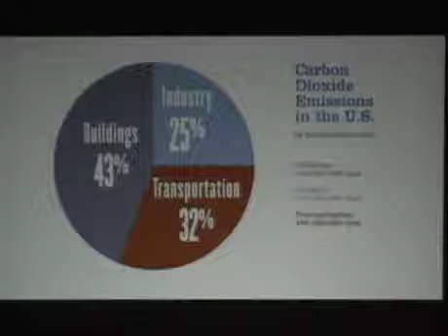As architects, what have we got to do with that? I grew up in the era in the 70s thinking that transportation, cars, were the problem—tailpipe emissions were the problem. Now most people accept around 40%, this data says 43%, of CO2 emissions come from buildings. In PlaNYC, they include industry and say that in New York City, 79% of CO2 emissions come from buildings.

So clearly, as architects, builders, and developers, we find ourselves in a very prominent position that we can't ignore this issue with the work that we do.

This is Carol's point: there's 5 billion square feet of buildings in New York City, and the PlaNYC document estimates that in 2030, 85% of the buildings that will exist are buildings that exist right now.

So if we really want to make a difference fast—yes, we're the architects for a building called One Bryant Park, the Bank of America Tower at One Bryant Park, 2.2 million square feet at LEED Platinum standard. But that's 5 years of our life so far, with another 9 months to go. So the quickest way to make a significant difference is to redo the existing stock, and that's really Carol's point.

The PlaNYC document talks about a reduction of 33 million tons of CO2 a year, and of that, 16.4 million tons will be saved by making buildings more efficient. So if you look at 2005, that's 58 million tons; by 2030, 90 million tons projected.

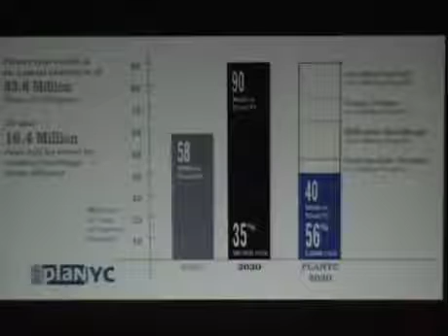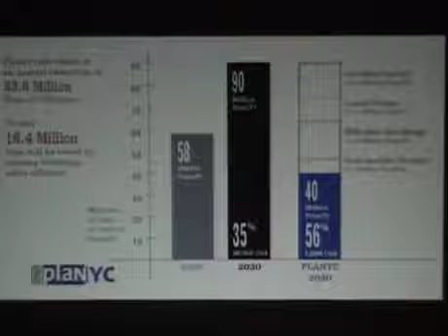The chart on the right is really talking about how PlaNYC plans on doing that—the escalation planned and the reduction as part of PlaNYC. A big part of it is right here in efficient buildings. There's clean power, avoided sprawl, sustainable transit. So a big part of this is in efficient buildings, new and existing.

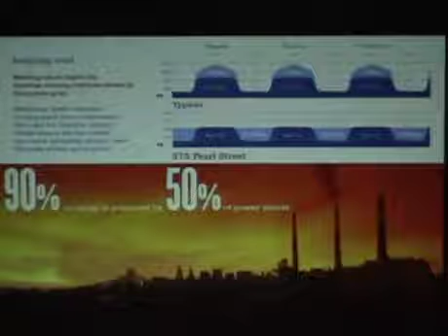All right, why is that really important? There's another thing called peaking loads, peak loads. 90% of the smog in our city is produced by 50% of the power plants. There's something called peaker power plants. Picture August 14th, 3 o'clock in the afternoon—the dirtiest power plants all get turned online to meet our peak demand.

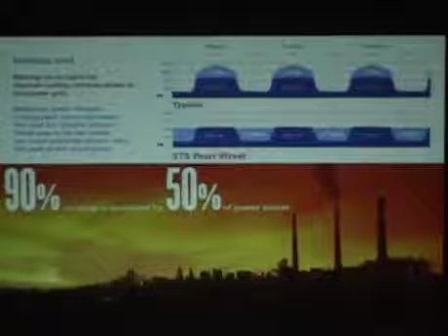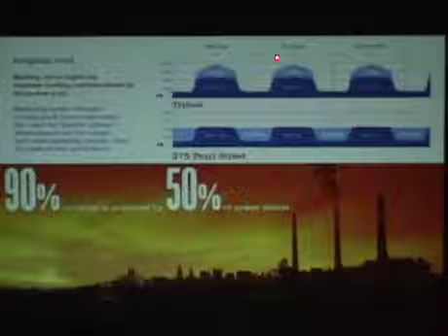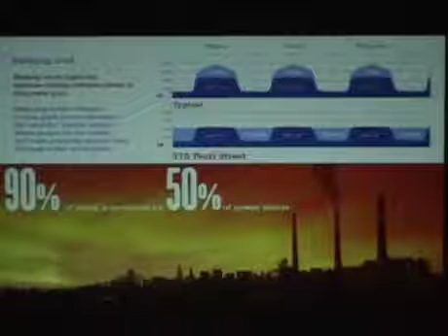So the best thing we can also do, besides use less energy, is use it at the right time, or clip the peak load. Office buildings kind of have a peak load in the middle of the afternoon—there's a base load that rises, a cooling load that rises, very little energy used at night, then it peaks up again. All the buildings are doing this at the same time. So the ideal scenario is to clip that off, fill in the lows, reduce the peaks, and diminish that peak load so that we're using our cleanest power plants.

How can you do this? Ice storage is one of the ways—use power when it's really cheap at night. It uses just as much energy, even a little bit more, but it's using it at a time that's much cheaper and much better for the environment.

The other thing is, how most of these things get paid for isn't really the save-the-planet stuff—most of it is actually about quality. They're better buildings; green buildings are better buildings. The air is quantifiably better. At the Condé Nast building, there's 85% particulate filtration. At One Bryant Park, 95% particulate filtration on the incoming air. And at 375 Pearl, we're also doing 95% particulate filtration on the incoming air.

Quantifiably the highest quality air you could have in an indoor work environment.

Daylight—there's a big dilemma we have right now. What's so green about an all-glass skyscraper? Well, there are inherent conflicts there. We've been on the side of health and productivity, since access to daylight and a changing daylight environment is one of the few things we can quantify as a rise in human health and productivity. So we're doing that—the key is high-performance glass walls and daylight dimming on the interior.

All of our work, we like to go back and try to understand what's special about this one unique place, unlike any other place on Earth.

So you can see the red dot here. Pearl Street, which seems very discontinuous, was actually part of a historical street on the early Manhattan maps. This is 375 Pearl right here. And Peter, what was it—Queen Street? Queen Street is the historic street that comes along.

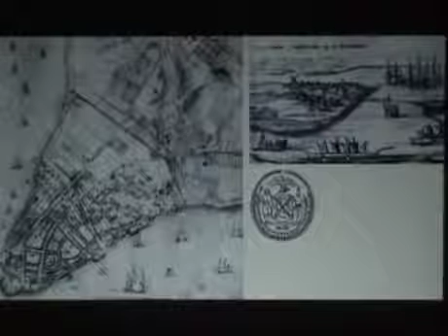I like this image—this is the Friedrich's view of Lower Manhattan, I think from 1646. The tallest thing on the skyline of Manhattan was wind power, and the transportation was wind power too, even reflected in the seal of New York City. This is our current seal of New York City—at the center of the seal is a wind-powered device. So we're exploring wind harvesting on the project also.

The 800-pound gorilla for our site was that when the Brooklyn Bridge was built, it severed a whole neighborhood in half. To this day this project has to deal with that—there's a neighborhood south of the Brooklyn Bridge and a neighborhood north of the Brooklyn Bridge. At the same time, this is arguably one of the greatest pieces of infrastructure architecture in America.

All of our projects, we like to think about what's free, what can be harvested for free. Whether it's a floor of interiors at the Empire State Building that we're doing for Skanska, or our office, which was the first LEED Platinum project in New York—it's what's there that you can harvest with no environmental impact, using existing resources without adding more stuff. On top of that, the sun is free, rain is free, bioprocesses, the earth is a heat sink, and wind. At 375 Pearl, one of the things that was free, as Doug just mentioned, was the whole building itself—they bought the project for the price of the land.

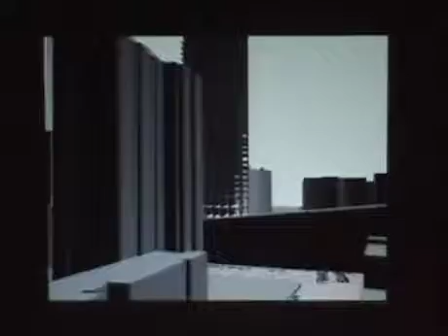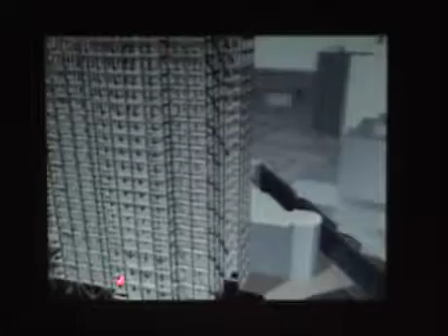So what we found is underneath that ugly skin is this kind of remarkable structure. Because engineers designed it, not architects, there's this beautiful cross-brace frame that runs around the whole project. Each one of these, what we call bustles, are where the wires were, and inside of that is this core of a beautiful diagrid that was designed purely by engineering concept.

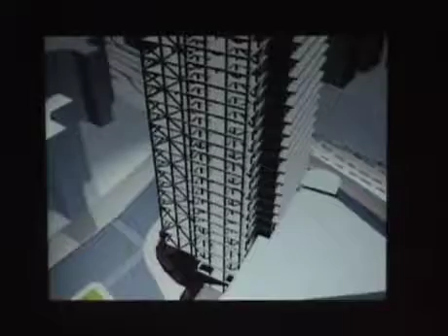Most of these buildings, the Verizon buildings, had crazy floor-to-floor heights—I was just talking to Dan Shannon, and their building's the same way, 1095. It was all designed for the equipment that was going in. So there's this very interesting diagrid. This back quarter actually cantilevers out over the high school, and what we saw was free was this whole frame that we got for free.

On top of that, we were thinking about this project not in the context of an early 70s building rehab, but really in the spirit of purpose-built buildings that are better for a modern use than if they had been built as housing or office buildings. So we're saying this is a much better new workplace than if it had been built as an office building. Why is that? Higher floor-to-floor heights.

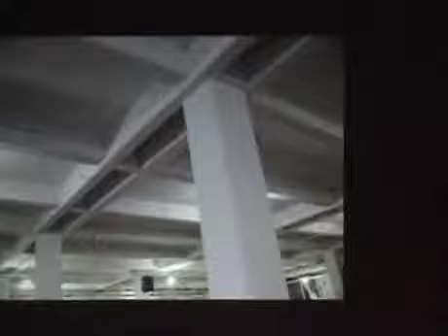Inside, this is just a photograph we took the other day. We have extremely high-quality dust-proof concrete because this is racking and stacking.

The other thing you can see is that the girders are double girders framed around the columns, so there's beams framing into girders, and the bottoms of the beams and girders are about the same height for the efficiency of racking wires overhead.

Very high quality dust-proof concrete, and this was so that it could punch vertical penetrations in the exact location where, in a typical office building, you couldn't. So we're thinking about indirect lighting, that we basically get a free ceiling in a building like this.

That's the diagrid. You can see the limestone panels on a steel truss on the inside, attached with these clips.

One of the things that, in the big picture thinking, a lot of smart people working on the project were thinking is, okay, what does a new skin on a building cost? Call it nominally $100 and something. We left out the part to get rid of a wall like this, which is another $100 a foot nominal to get that off the building with union laborers, which is a challenge we're dealing with right now.

As opposed to reskinning a building that had windows, to get the wall off and start with a fresh start actually costs us money.

This is the view from the Brooklyn Bridge right now, and this is a quick diagram of exposing that truss with the clearest possible low-iron, low-E glass.

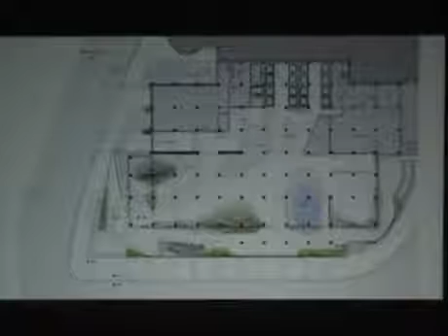There's a very clear idea that this building could be a strong link to a working and living community across the bridge. We interviewed our office — 46% of our office actually lives in Brooklyn.

View of the lobby, and the big challenge of how this building meets the ground.

This is just a huge challenge right now. This building didn't really meet the ground — it's actually been a blight on the neighborhood for a long time. And how we can re-engage it.

So we have a building that meets the sky in a different way, activates with the sun differently, and how it meets the ground. We hope to establish the start of a new neighborhood.

So this is the view now approaching from the south as we're going ahead.